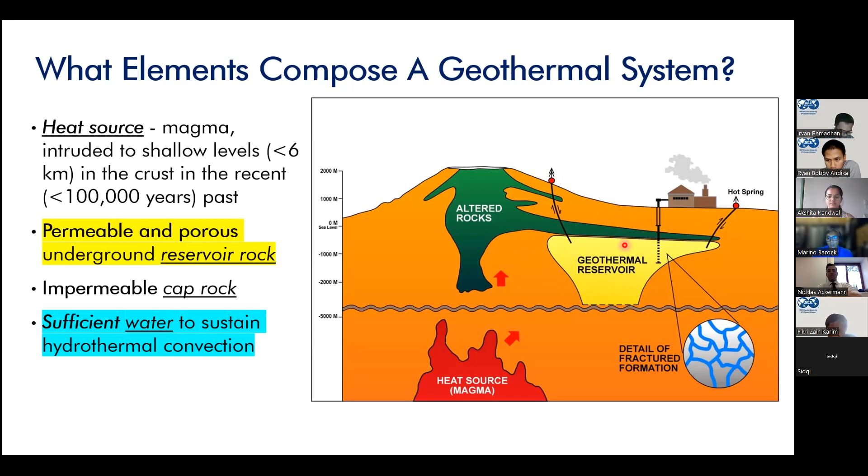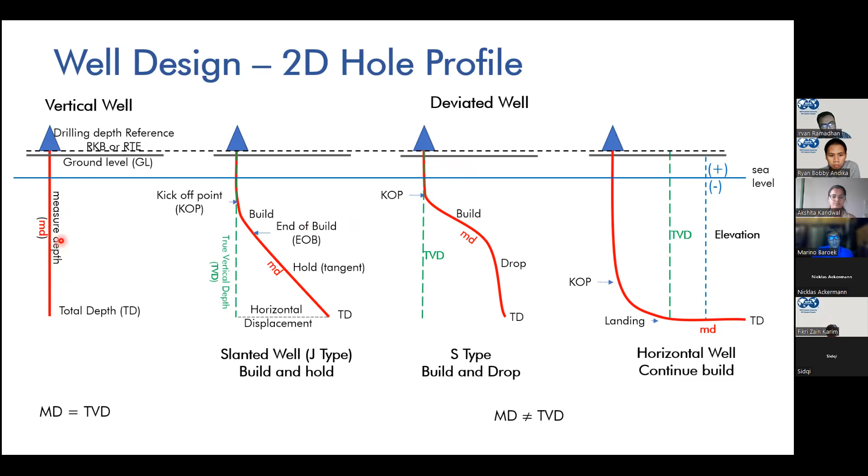It's because with wireline, after you complete the well, you run a logging tool using a wireline, and then you try to get information from the reservoir, as is going to be shown hereafter.

So basically, the way we drill the well is that you start with a bigger hole size. This is called the surface hole size, and then you put a casing. And this is usually a surface casing. Sorry, starting with a conductor.

I would say that there's several types of holes. So in this one, you can have a conductor as big as 36 inch with a 30-inch conductor, and then you will drill the surface section. Usually the big hole is around 26 inch, and then you put your casing, around 20-inch casing, and then you drill a smaller hole size, basically.

Usually it can be 17.5 or 12.25. It depends on your hole type. And then you put your cemented casing, and this is very tricky over here, because this is where the geologists in geothermal need to pay attention to the depth of this last cemented casing. So we call it a PCS depth, or a production casing shoe depth.

Why? Because it needs to be set close to the top of the reservoir. We don't want to drill into the reservoir because it's a fractured reservoir. One of the challenges is when you drill a fractured reservoir, the fracture is permeable enough that you will start losing circulation. And when you start losing circulation, it's kind of difficult to cement this casing, because this casing is cemented. So in exploration drilling, this is a challenge, because we heavily rely on the geophysics data to help us set this depth.

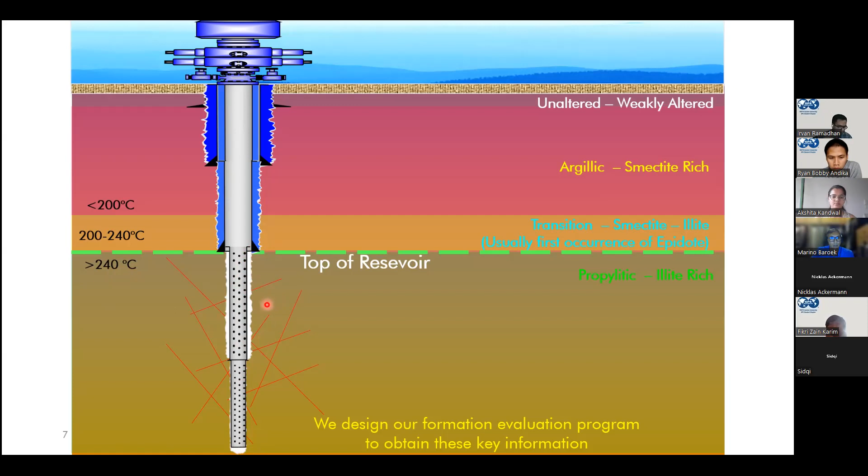and then we can split it and run a perforated liner. The function is to avoid hole collapse, so we put a liner and then we drill a smaller hole and put another smaller perforated liner. And what are the key information that we need? We need lithology, alterations, the top of reservoir, and then the permeability, temperature, and pressure. Those are the information we need to characterize our reservoir, and based on that, we design our formation evaluation program in order to obtain this key information.

So this is just to give you an example of the formation evaluation program. The left figure is the hole size and the casing design. Usually when we do a drilling prognosis, this is one of the information required: where we want to put our casing, what's the hole size, what's the casing size, how many hole sizes we are going to use, what's the depth. So this is the total depth of the sections, and then expected lithology based on the prognosis,

and then usually we'll start with cutting data from the surface up to the top of the reservoir, because we'll have the cuttings, and we'll do the cutting analysis at site. And as we enter the reservoir, we may or may not have cuttings because of the lost circulation. So that's where we run the logging, and we have core samples at several depths. We can also use the mechanical sidewall core as well, because in a good permeability well, we'll most likely have lost circulation, and if we don't acquire any data, then we don't have any information aside from the usual pressure and temperature data.

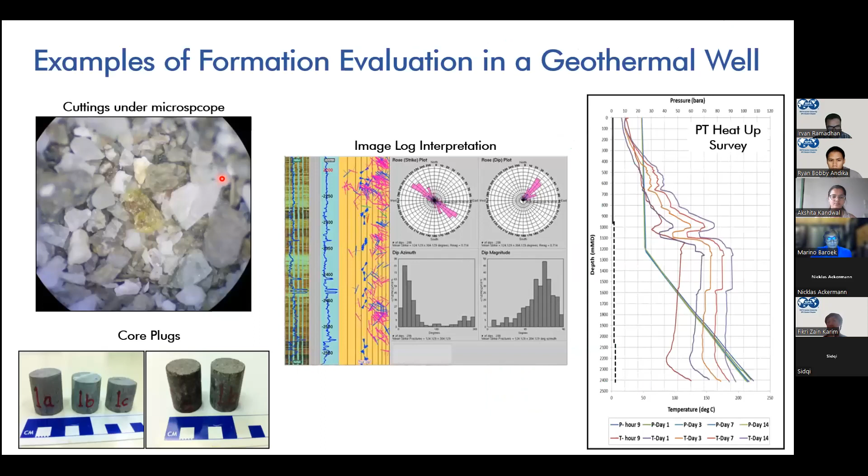Okay, so let me check time-wise. Okay, still have good time. So these are just an example. We can have more discussion later.

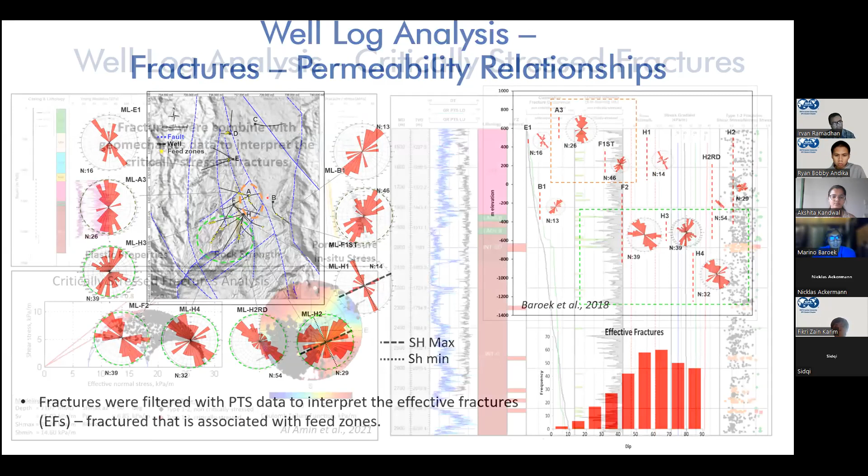And then I think we did a more advanced analysis. We applied geomechanics, basically. We utilized sonic logs and density logs to generate the elastic properties. We already have the pressure data as pore pressure, and then we generate the in situ stresses. And with that, we can do what we call critically stressed fracture analysis.

So if you know the stress difference and the stress orientations, by frictional equilibrium theory you know that some fractures, with their orientation relative to the maximum horizontal stress, will tend to be critically stressed, because if you change the pore pressure, it will shift the stresses, generating an imbalance, and these fractures are bound by their coefficient of internal friction. If it exceeds the coefficient of internal friction, the fracture will move. And since the fracture planes are not flat and smooth, you will tend to preserve permeability.

And when we filter all the fractures, including the effective fractures I've shown before, we can see in the right figure where you have the feed zones and the number of fractures for one well, that the critically stressed fractures shown in red correlate very well with the permeable zones. This suggests our feed zones may be critically stressed fractures, and we can try to identify their orientation, which will be useful for future well targeting.

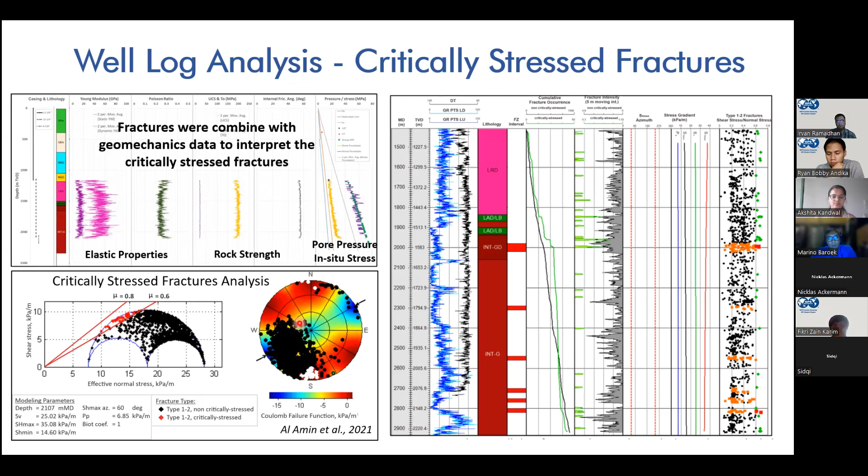So the last three slides show how we utilize the image log and the other logs for fracture interpretation. We've reached the end of my presentation, and I'd like to close with these challenges. There are three or four challenges, especially high reservoir temperature. Most wireline tools have a temperature maximum of around 180, or 350 degrees, maybe less, and geothermal reservoirs are more than 240.

And when we have a good well, after we drill it usually heats up quickly, so we will have limitations in trying to get the full logging interval. How to mitigate that? Usually we have to have enough water and do continuous injection. We can run a high temperature tool, but availability is also limited. Or we can combine one or two logs in one run to minimize the logging time.

Another one is loss circulation, which is common, but for acoustic-based tools in particular this will affect the quality, especially above the liquid level, because sound waves cannot travel in void space, so we will have poor quality. To mitigate that, maintain a liquid level. It might be a big challenge in a good permeability well, because all the fluid will tend to go out into the formation.

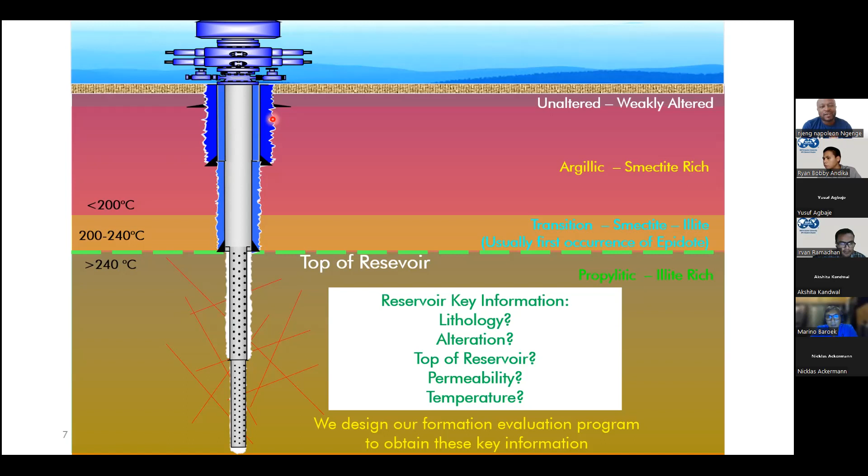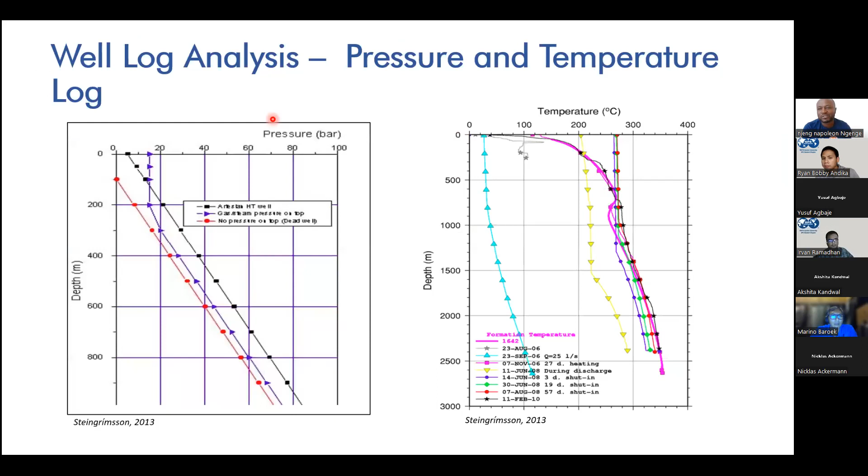I want to direct my question to one of the slides where you presented stereo plots for the fractures. Okay. This one? No, where you had those stereo plots, you had 4,900 fractures that you analyzed. Yeah, this one, I think. Okay. You characterized the fractures and then told us about the orientation. And then you mentioned they were all high angle fractures.

So I wish to ask, in case you have high angle or low angle fractures, which one poses a challenge technically during geothermal exploration? Why is it important that you mention high angle or low angle? Yeah.

It's just one way of putting a statistic, and you see, in this case we also have a low angle, but statistically the areas are having high angle fractures. It can naturally have high angle fractures, or maybe it's because we have a deviated well, so we intersect more high angle fractures with respect to the well.

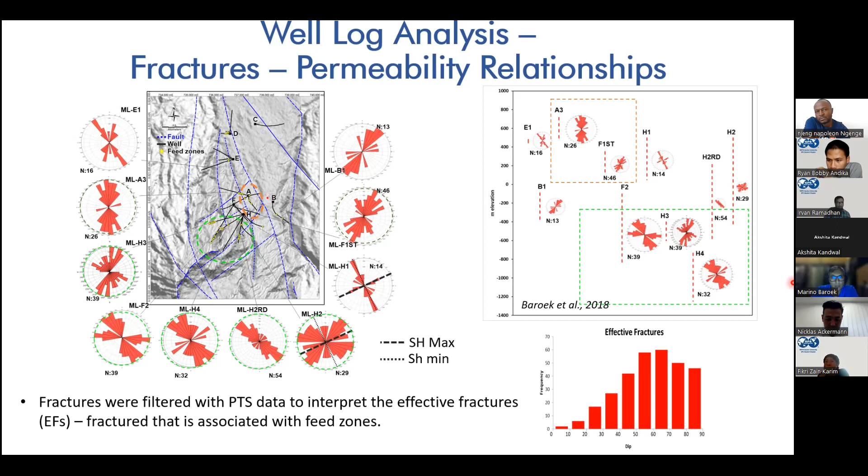But I guess if you try to drill horizontal wells, then you need to have a special tool to run the logging, basically. But it's the same standard tool. I mean, we can apply what I present here to the wells in Germany as well to characterize, for example. Yeah, this one. This is basically a standard tool in oil and gas. Okay, thank you very much for your answer.

I guess there are some high temperature tools, especially pressure and temperature, that can withstand higher temperature. These typical high temperature tools are more like a sleeve type of tool, so they don't expose their cables. These cables are the ones that get burned because of the high temperature. So that's why the resistivity-based image logs that have arms have limitations. There is a high temperature image log with arms, but it's not common. It's limited in availability. So the acoustic base is more commonly used because it's more sleeve type, and then you can rotate.

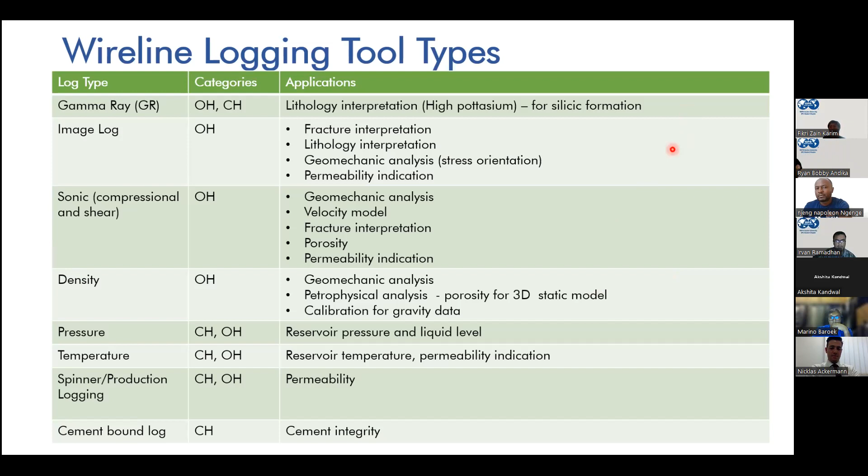Yeah, thank you for the opportunity, and thanks for the very insightful presentation, Mr. Marino. I have a question regarding the conceptual model. You showed from the slides the conceptual model from a region that has volcanics. For example, here in Germany, there are not many volcanic mountains. How can we, as geoscientists, create a conceptual model if the region has no association with volcanics? Thanks.

That's a good question, especially for me, considering I don't have experience in the basin type geothermal system. So it's going to be a learning curve for me too. But based on the publications, maybe I can share. But you guys, or maybe the audience, know better than I do.

It's more related to whether you have an aquifer deep enough that you can tap the water, and then you can utilize the heat, say more than 120, or less than 180, because if you have a temperature higher than 180, then you will find difficulties finding a pump that can withstand the temperature. And so with that, I don't know whether you can have hot springs as an indication.

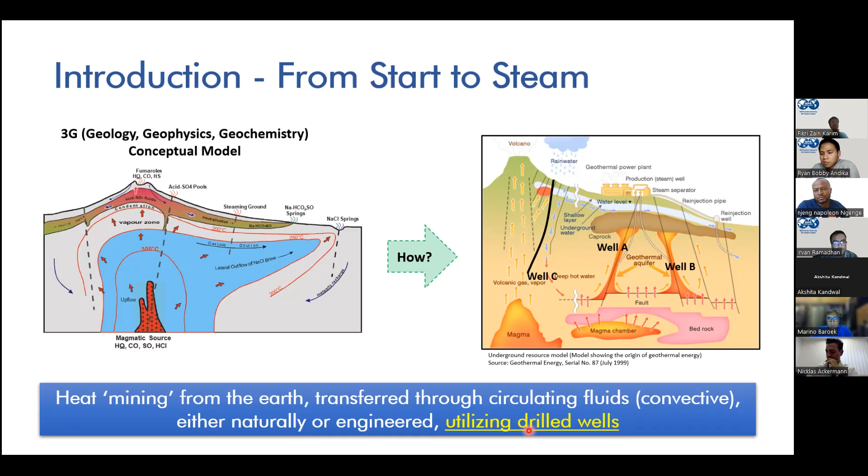So we already had a lot of discussion. Maybe we can wrap it up now. Thank you very much on behalf of SPE Student Chapter RWTH Aachen. We would like to say thank you to our speaker, Mr. Marino Baroek, for the fruitful materials that have been presented, and also to all participants who actively participated in our discussion today. We hope that this short session can provide you with new insight about well logging application in the geothermal industry.